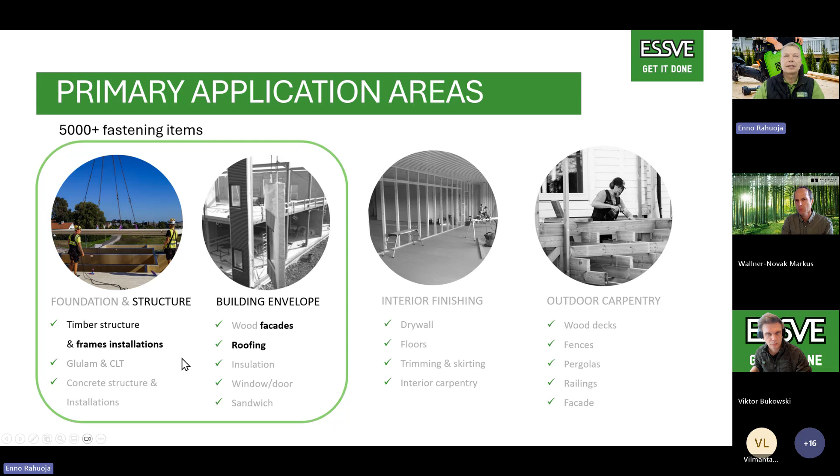What I wanted to say is that those are our 4 core focus areas, and today we are able to put together that green circle here, where we talk about roofs and facades, which is kind of a building envelope, and then it's a frame installation system. So this is the subject where we dive deeply into our mix of product range, going deeply only into that insulated wall or roof area.

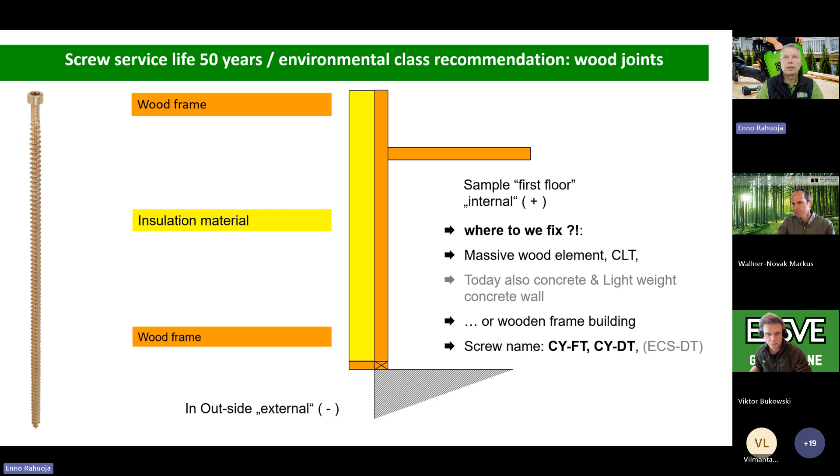Subject shortly: when you have some kind of timber frame wall, then it's an option to put full insulation on top as the first step. Normally you build that up with brackets or a cross pattern framework, but today's subject is that you can have full insulation on it. Then normally you're going to have a wind barrier, which makes this application internal. And for this application, we are looking at a 50-year working lifetime.

I have put here some recommended environmental classes for the wooden joints as well. Now we're coming to the framework.

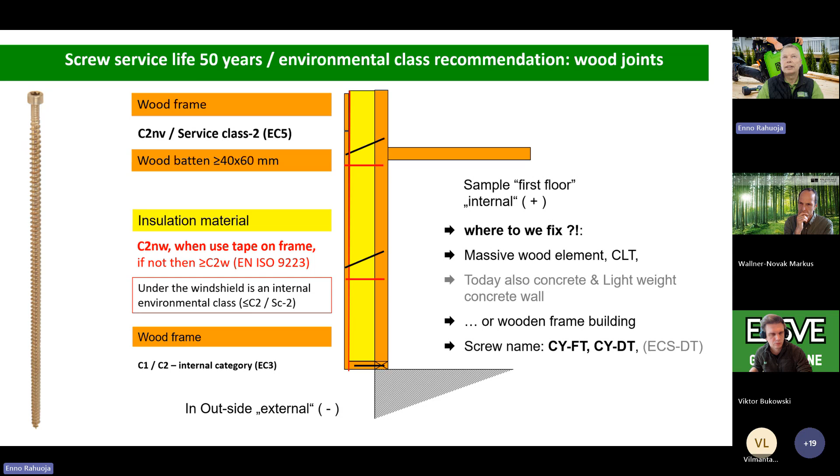The framework is normally fixed with first 2 or 3 screws to get it leveled, but also cross-fixing, so we get a nicely fixed frame. According to the calculation tool, we determine the distances here. In the next step, you need angle fasteners, which take all the vertical loads, also according to the calculation tool we're going to introduce you to later. Then it comes to the facade.

I will remark that in the ESSVE range we have the well-known ET-T screw, which is a double-threaded screw. I have marked it red for the reason that the double-threaded ET-T screw is not recommended for this application, because here the second thread has a different geometry and has a traction effect, meaning it pulls elements together. When you fix it, it's difficult to install and level the facade framework on it.

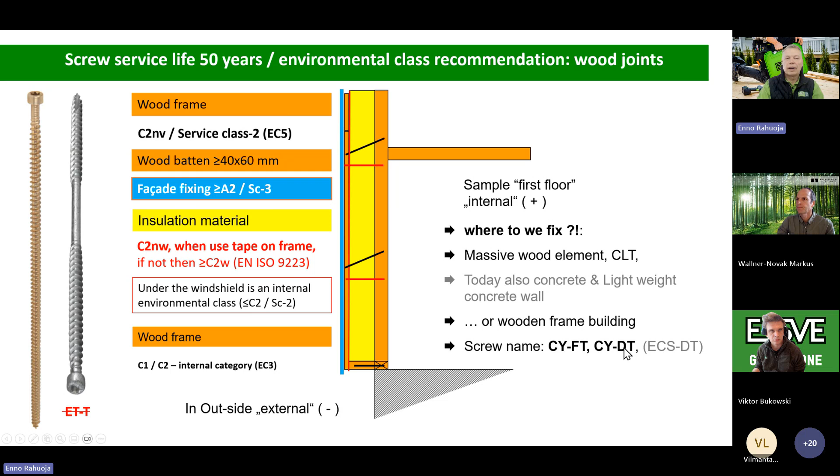So for that, we have other fasteners. Either you use a full-threaded screw from the ESSVE range, or we also have a double-threaded one with the same geometry, called CY-DT. This is a light intro from my side, just to show that this product also has ETA approval, and it is approved for roof and facade, having a CE marking on it.

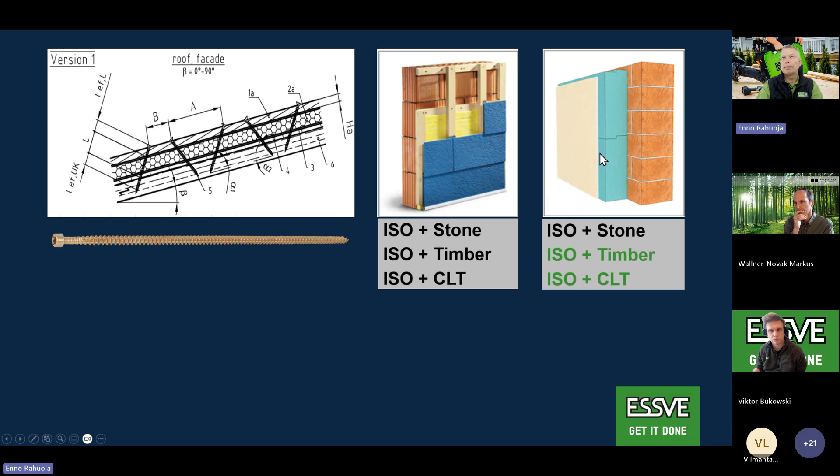Here on the right-hand side, you see typical facade elements where you build that up. I have background on brick, but it could be cross-fixing of different timber applications, or it could be a wooden wall with an existing type of solution that you want to renovate. So for that reason, you can do it like CLT new buildings or renovation if there's timber behind it.

We have 4 key arguments: insulation in roof and facade areas, so cross frame is not needed and can be replaced with screws; good thermal insulation up to 400 millimeters; and thermal insulation has a wide usage area.

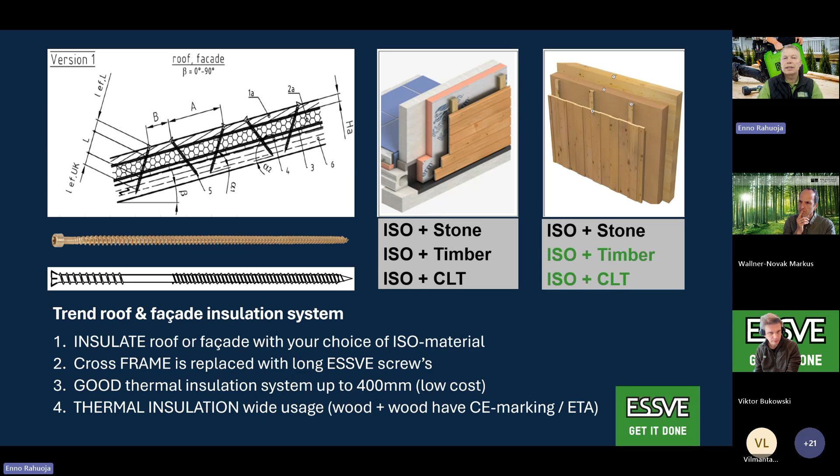If you have more questions, in Eastern Europe we are also developing further on timber-to-concrete application, but that's not today's subject. Today is more about timber-to-timber.

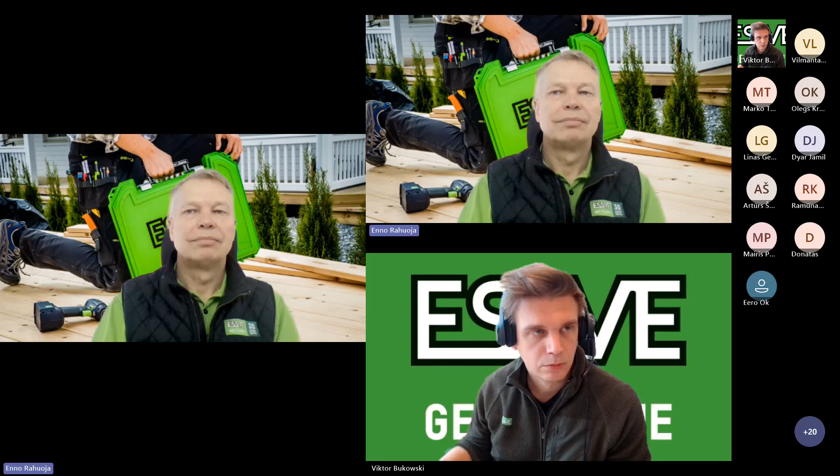So I will share my screen. What I want to do is give you a short overview over the systems there and a little bit about the technical backgrounds, and then dive into two examples: one the facade and one for the roof. It's just very brief—if you show a design tool you can just show a little bit, but if you're an engineer you have to deal with it and consider a little bit more. It always looks very easy when you show it, but that's in the nature of this.

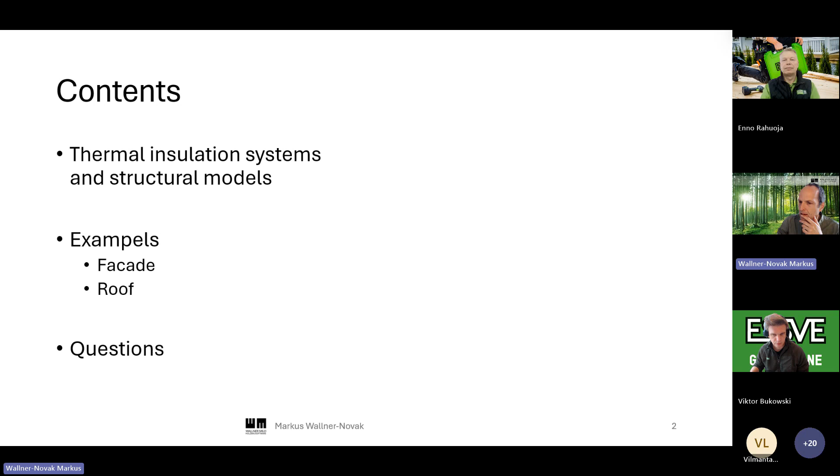So I start with the roof because that was the last slide we saw, and there we have two different ways to either newly install or, very often, to refurbish and thermally insulate later. One is with the so-called hard insulation, which is a more or less incompressible insulation.

And the screws there hold the roof structure that is built up against sliding down, on the one hand, so they are inclined. There is a mechanism, as we will see in another slide, where the screw goes into tension and the insulation can catch the compression part, which is not very much, but it can transform it.

On the other hand, we have a few screws that are responsible for the wind suction—so some screws are there against wind suction if it's required, depending on the weight of the cover and the other screws.

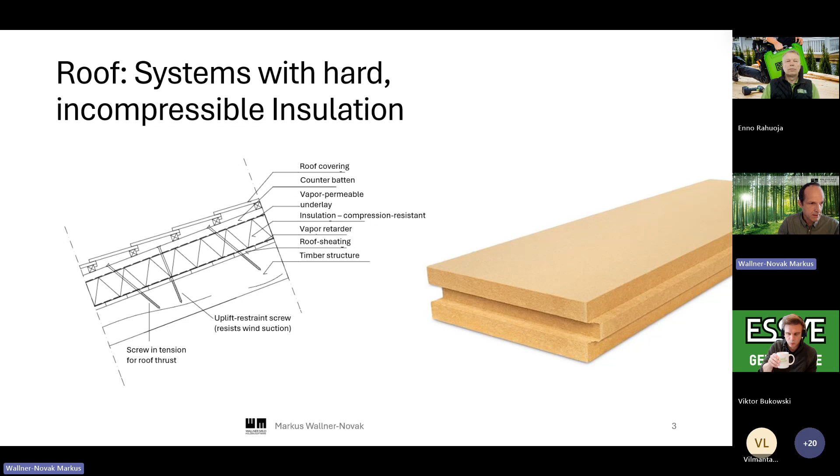Then there is a second system where you can use soft insulation. There it's more like a stilting system—the insulation just insulates and doesn't carry any compressive loads or something, so you keep a distance. It could be a void as well, but you want to use this space for the insulation. So these screws are in compression and tension, and depending on the loads, you transfer the loads through the screws, and that keeps the distance.

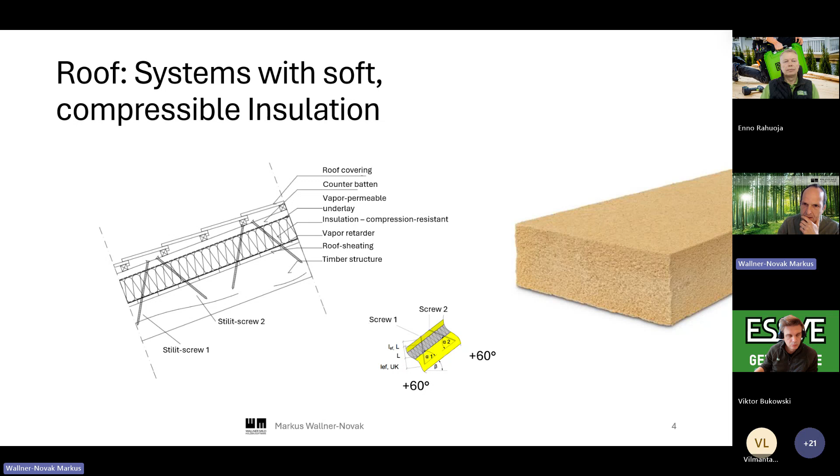There's often a question: what's the difference between so-called hard and soft? It's not a very exact term, we know, but the difference is the strength or stress that you can apply till the strain is 10%—that's 0.05 Newton per square millimeter. If you calculate it—I did that, it's easier to understand or memorize—if you step on this insulation, you have about 250 square centimeters at the bottom of your foot, and a somewhat heavy person would produce this stress.

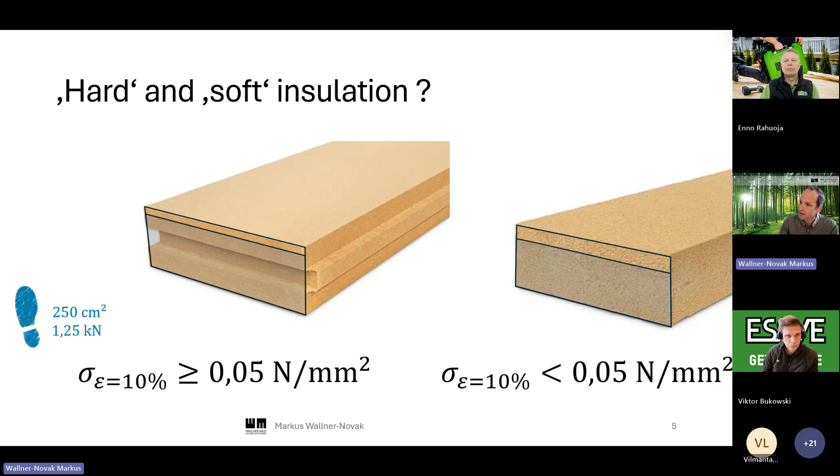So if you step on it and it compresses more than 10%, it's probably a soft insulation, and if it's stable and doesn't compress much more, it's considered a hard insulation. The producers usually define this, and we have our different products in the software as well.

Then there was a little bit of work to do with the modeling and with what can break—that's the engineer's job. Murphy's law says that everything that can go wrong will go wrong, and we want to avoid this. So that's our way of thinking: we think about all the different mechanisms that can lead to damage, to prove that they won't.

This is a bit mixed in language—I hope you follow, but I added the translation so it's understandable. So we have all the different failure modes from the screw and the wind suction, shear from the roof, and different failure modes, and the software checks all these modes. We have different loadings—it's snow, wind, and self-weight usually that are considered here in the software.

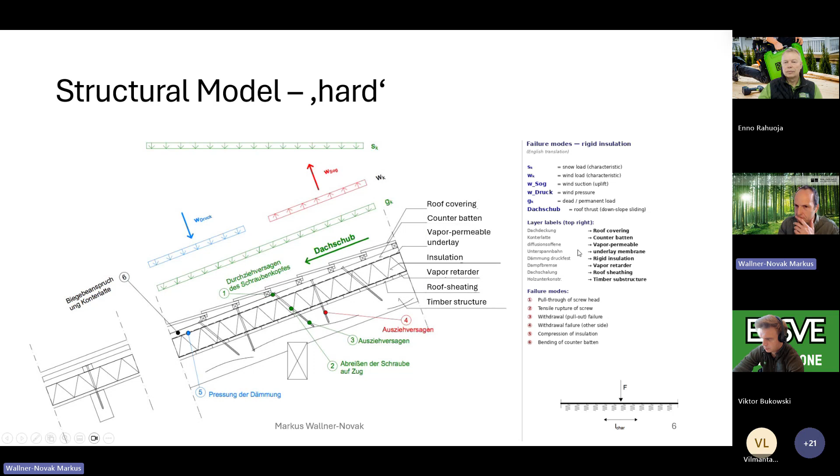A little bit more difficult in terms of statics is this stilt solution.

Because then we have to find some structural systems. The counter batten works as a light beam on top, and then the stilts are like supports, like in this diagram here. And you can find some moment lines and can solve this. That's not so much of a problem, but that's a bit beyond the European technical approval that ESSVE has, and that's implemented in the software.

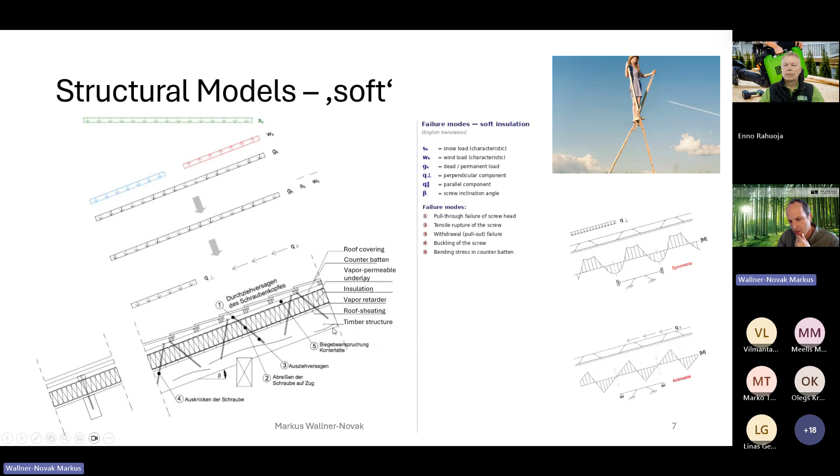So the roofs are a little bit more complicated in terms of structural models. So this we solved first, and then we continued with the application in a facade.

And I will, in terms of examples, start with the facade system that Enno just showed. Usually we have one screw vertical and one inclined, and you can set it as you want. We could also tilt both screws. You can define these angles here, the top screw and the first screw and the second screw can have its angles. In the roof, it's usually 60 degrees, like we saw here.

So they're both inclined, and in the wall, as Enno also said, usually you set the distance first, and then you screw the additional lifting screws for the vertical load. Here you only have self-weight usually as load. The screws have to carry the additional structures here, and you have wind compression or wind suction. That's the thing here. There's no snow load or something, that's clear.

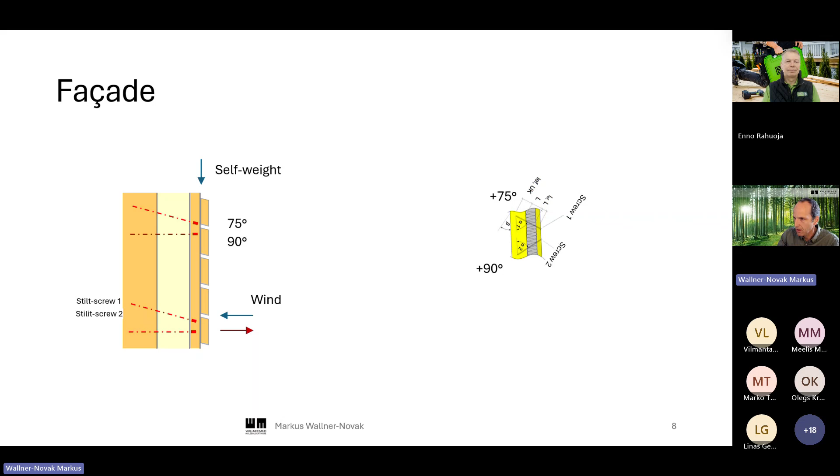Yes, so this is about the main structural thinking behind the programs we have. And I want to show you two examples just to see how the program works and give you some hints how you can apply and use this.

So we have one with a rather thick insulation of 320 millimeters, soft insulation. So this is compressible, and the screws have to take all the load. There will be no help, so to speak, from the insulation, no load carrying help. And then we have no loads, other than the self-weight and the wind. And I used the counterbatten rather thick then because the screws need to have a certain amount of thread in the counterbatten, so you have to have a bit of a section there.

And the substructure is not really important. I chose 20 centimeters. It could be less. In CLT, it's sometimes only 12 centimeters. That can depend from case to case. And then, as I said, the screw angles will be 90 degrees for the first screw and 75 degrees, so it's inclined for the second screw.

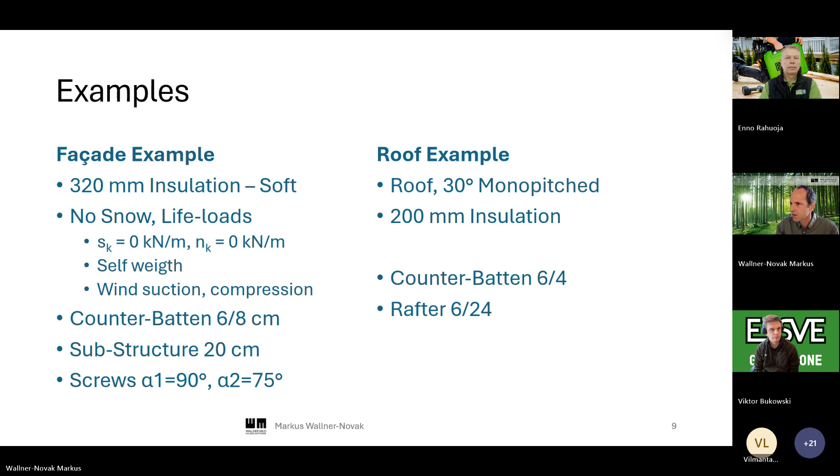And then we start with a second example for a roof. So to come to the, I just changed the screen. It's easier for me then. So to come to the example...

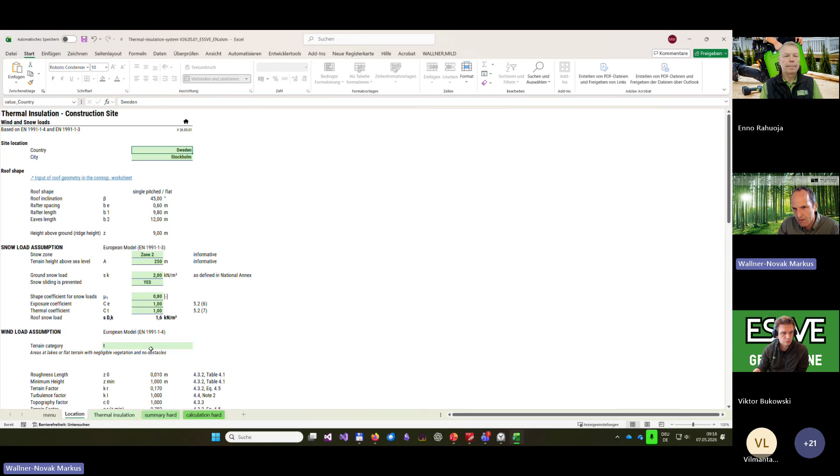And then the structure is relatively straightforward. You could set data from your site location. That's more for the roofs than for the facades. I will use that for the roof more than for the facade. So because we want to have the snow and the wind load, we could do this also. Maybe let's do this also here for the facade, because we want to know about the wind.

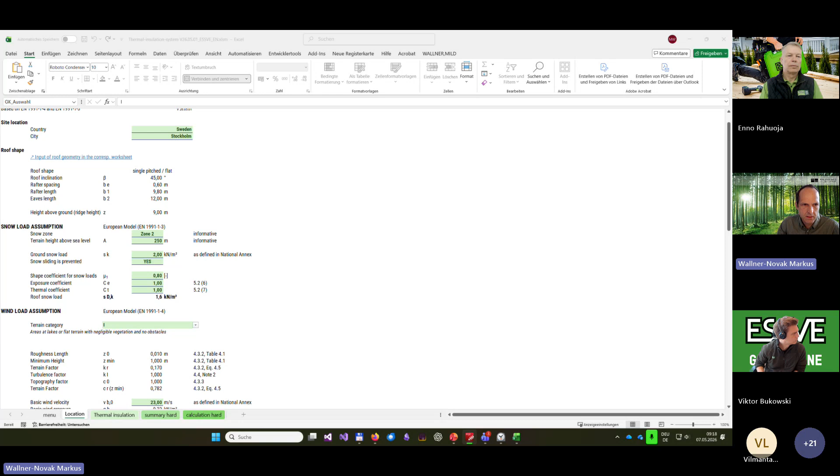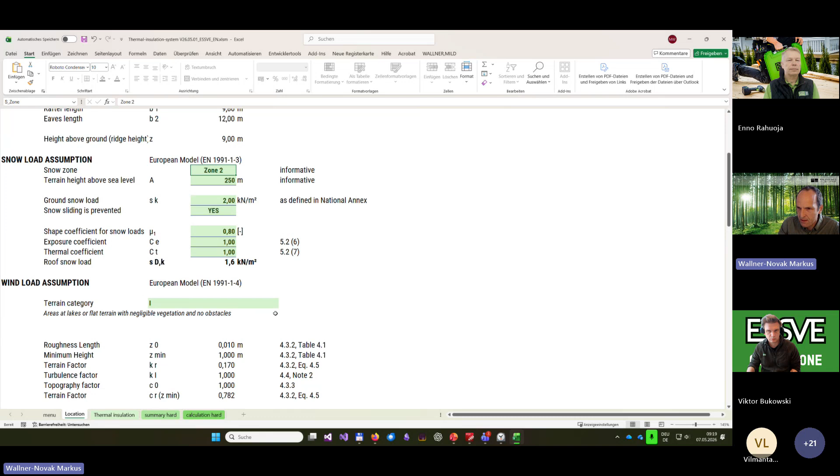So we could just set some values here. So we want to input some data here from Estonia, Tallinn, for example. The geometry will be set later, and then the snow load is not really interesting, as I said, for the facade system, but we could say we are in terrain category 2, and our basic wind is maybe 21 in Estonia, meters per second, right? So then we get this peak velocity depending also on the height, the ridge height, which we will set later. So it could change a bit, but we preset the place and inform the program how the wind will be.

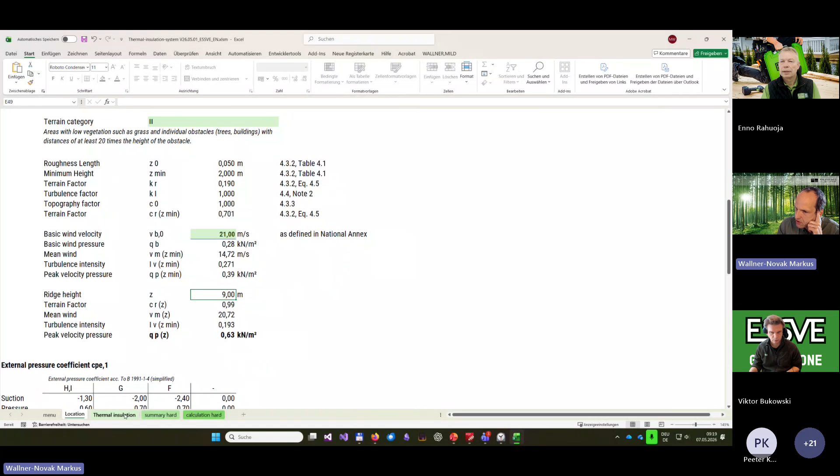Okay, so we also have these wind values here, and then we go to the second sheet, which is the thermal insulation itself, and then we have output. It's always a summary and a calculation. So the summary is the short output, and the calculation is the longer output. And in this case, we have a soft insulation.

As I stated, we want to have this system with the stilts. The screws are stilting the counter batten, so to speak. And we've set here the load for snow and also the live load to 0, because we don't need any live load here. And we can set a facade weight from the additional build-ups. That's usually rather lightweight, only 0.2 or 0.3 kilonewtons per square meter that comes from the loading.

And then here we have 90 degrees. So this is a universal tool. You can use it for the roof and also for the facade structures, for the walls.

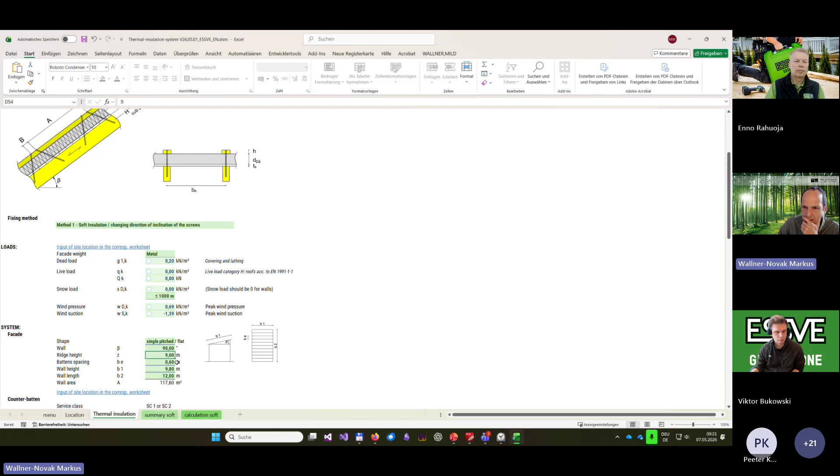And we can have a batten spacing of maybe 0.625 meters. That's sometimes or often used, and the height could be maybe 6 meters. And also the wind is calculated then for the 6 meters.

And then we have the counter batten dimension and also the quality. Usually it's a C24, and I used 8 times 6. I will give you the information later. We can see if we reduce what will happen then. So I have a rather large counter batten.

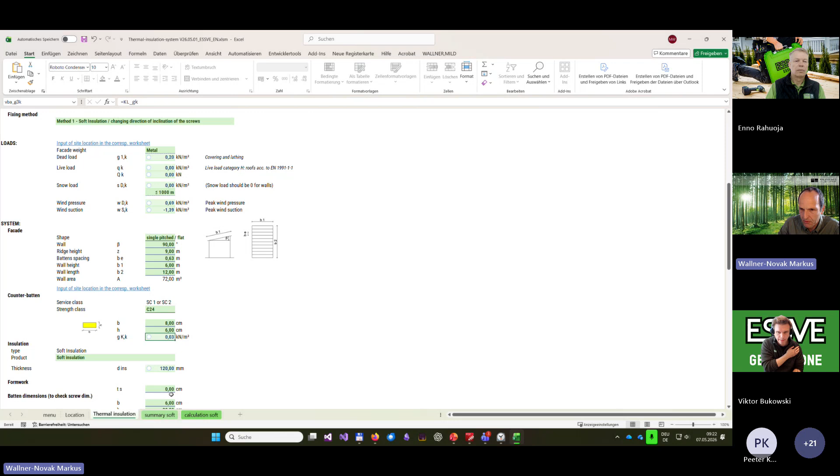And then we said we have 320 millimeters of insulation. And the batten dimension could be, I don't know, 10, 20, or if it's a CLT, it could be 100 centimeters. It's like a 1 meter stripe. That doesn't really matter. The width is not so important. It's just some information for the program to deal with the screws also.

And then we can set which screw we want. By default, it's the shortest screw is selected, which is seldom correct. And you get the information. First, here there's a block about the geometry of the screw, and the program checks all the length values and also the thread length in the counter batten and so on. So for the input, we get information about the length that is geometrically feasible.

So it should be longer than 470 millimeters with the 60 degrees. And we have to change this. First, we want to set this to 75 and 90 degrees because we have this system and the length changes a bit. And we can set this now by hand.

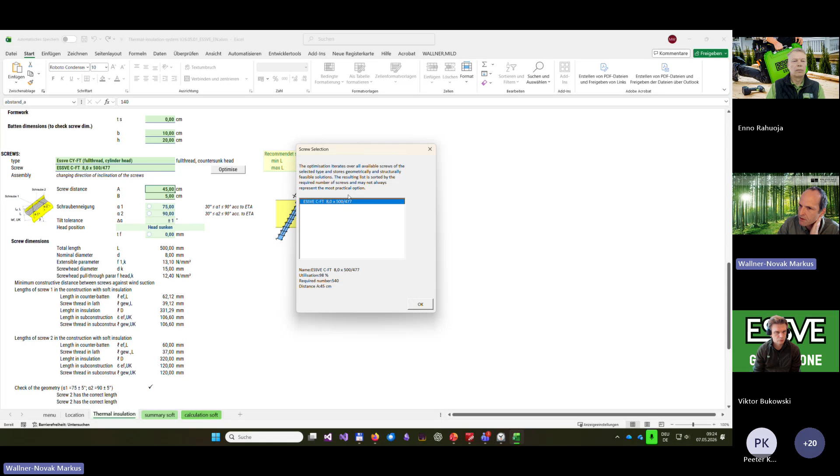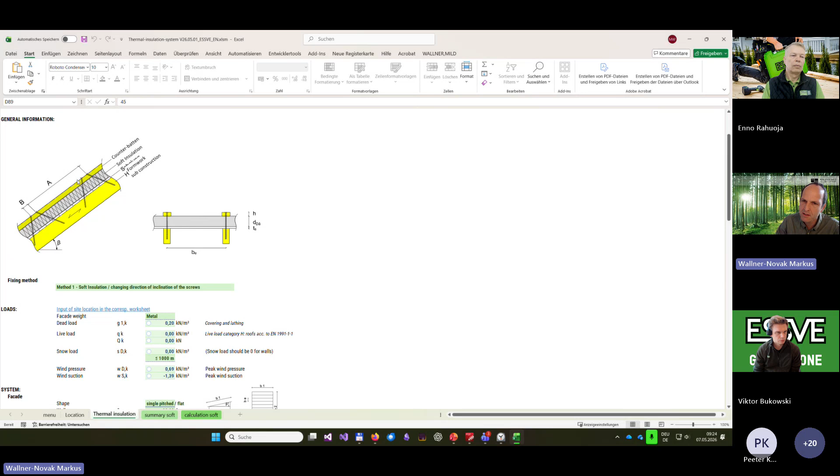And the only thing now we have to set is the screw distance, or we could say optimize. So then the program looks for the screw that's geometrically feasible and also changes the screw distance. So every 45 centimeters, that's the result the program finds - we have to scroll up - so every 45 centimeters, it repeats.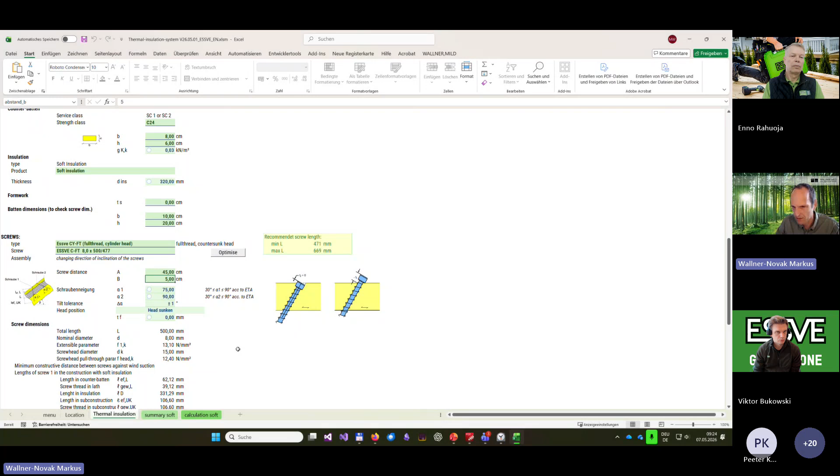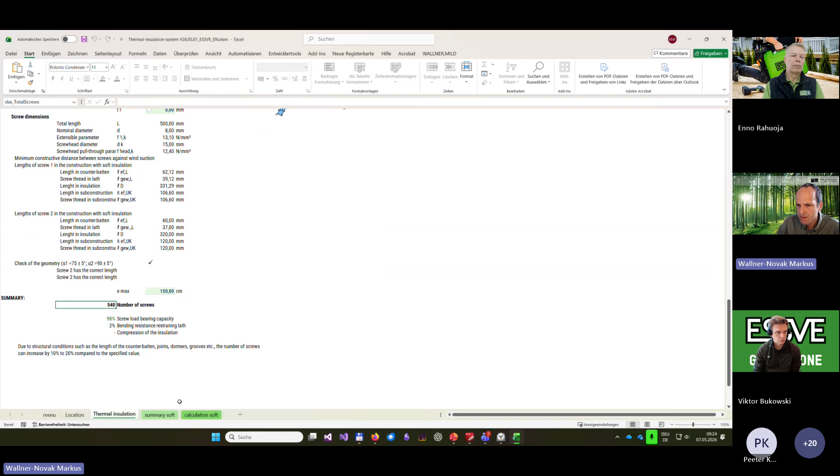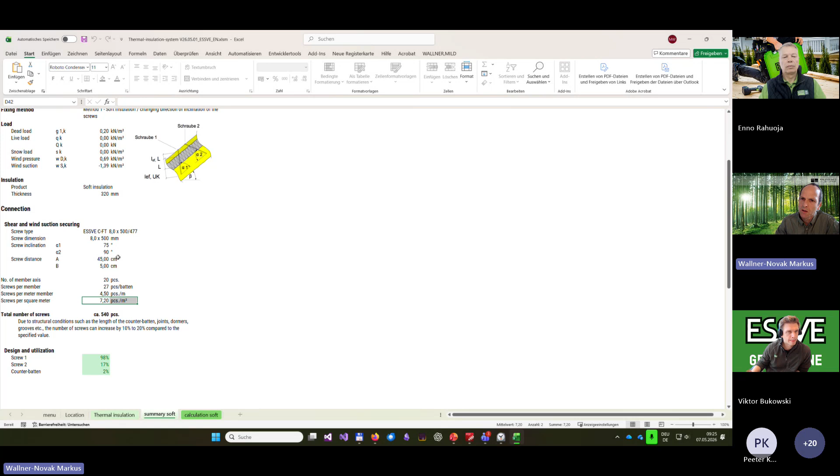So the axial distance is 45, and between the two screws, it's 5 centimeters. That's usually a default. You can change this also, that doesn't change much. And then as a result, you get the number of screws. You get 540 screws in this case for the whole area. And in the summary, you can see how many screws per batten or how many screws per square meter wall you have, so that you can calculate and estimate the price for the screws in the project.

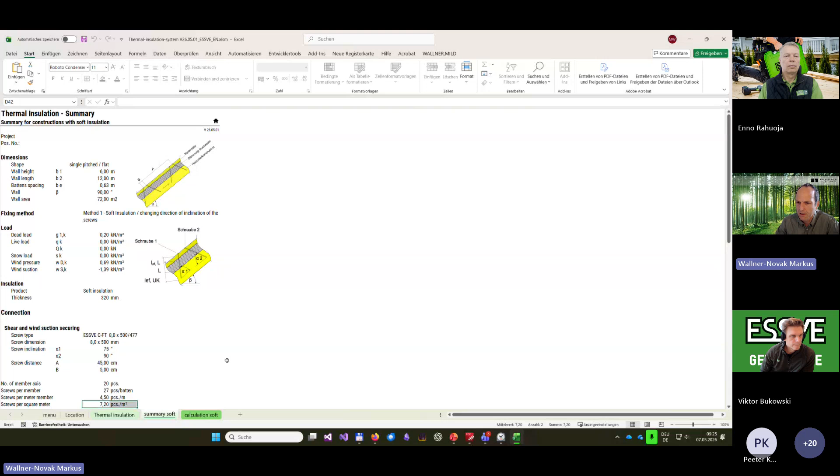And this is only a one-sheet information, which gives you most of the required information. And if you want to see the details, you have all the calculations here with the models and also the screw design of this installation.

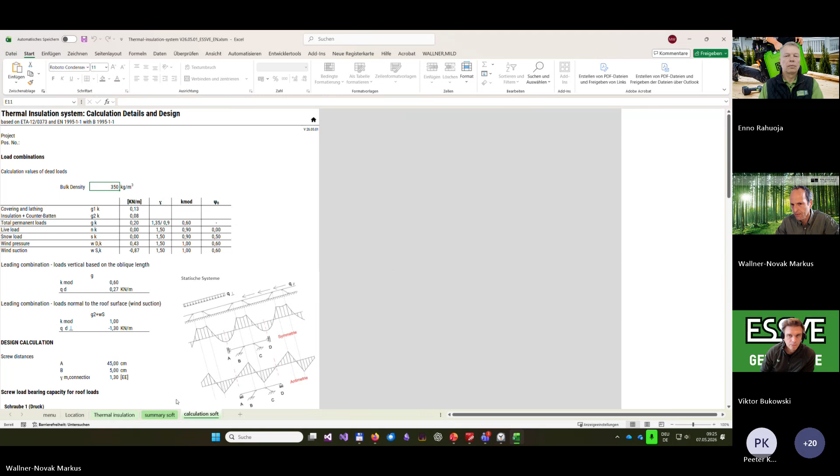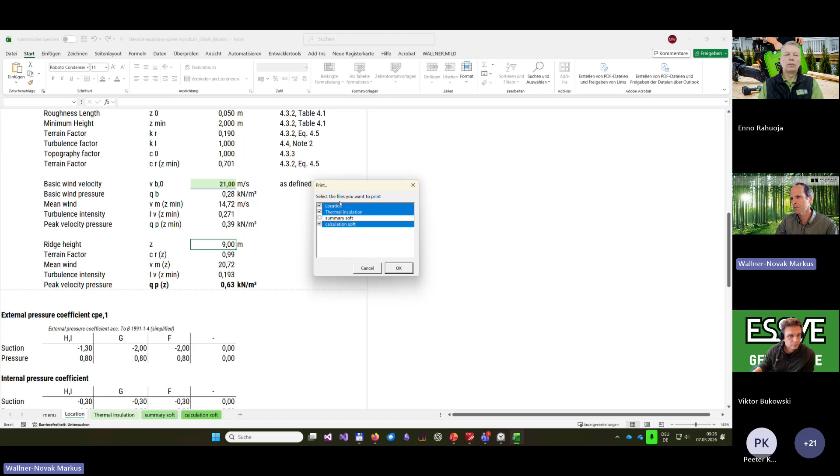And then when you finished, you can go and print. This is a German version now, but sorry - it should work also in your language, in your Excel language. And if you press print, then you have the option to select or deselect parts. You could just print the summary if you want, or you just print the location and the calculation, whatever you want. So you can choose between the sheets that we have.

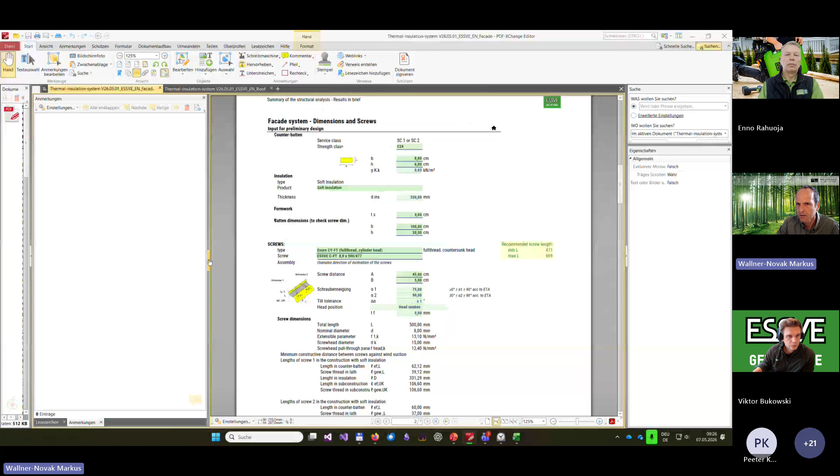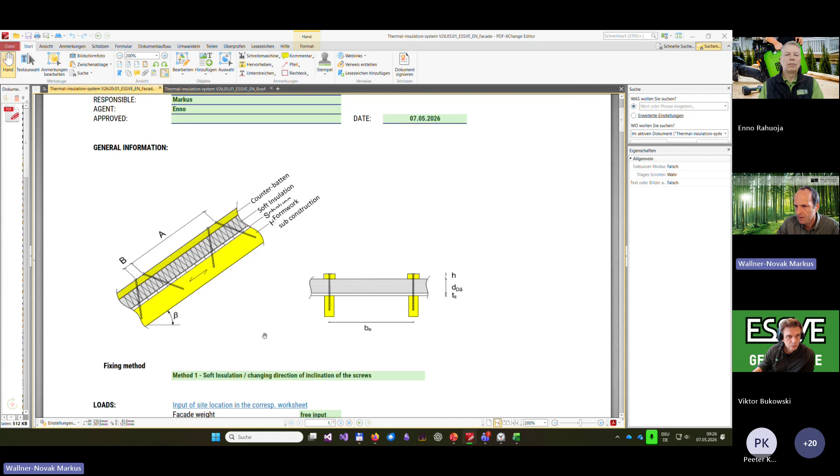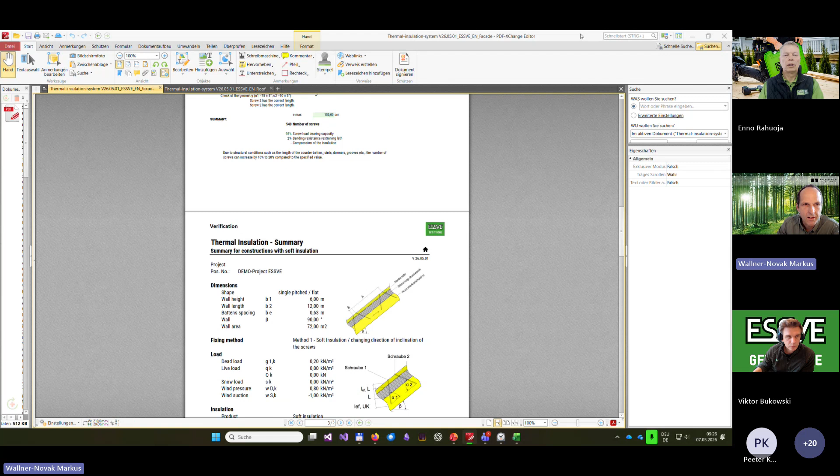And the result then is a PDF file that looks like this. You get here the information about the facade. We didn't fill out the required input data for this example, but you get all the data you need for the design and also for the producers, or for the end installers.

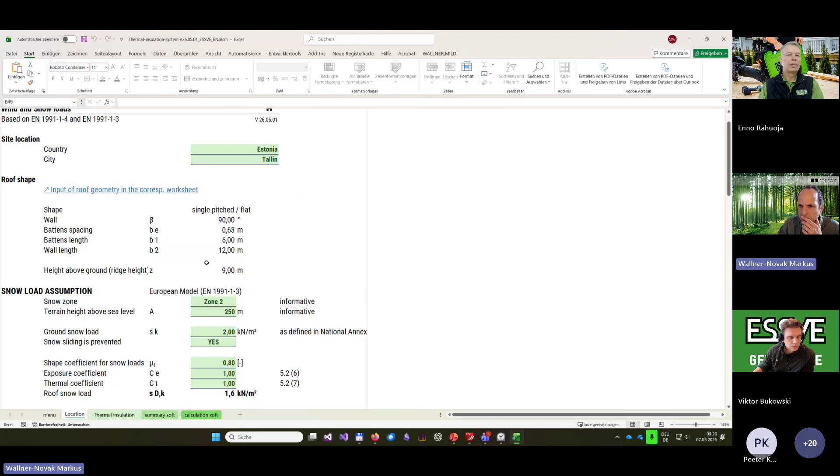Thank you. The other thing we could do, just a very brief look - we could set here a roof structure. Then we could maybe try with a hard compressible, incompressible construction, and maybe have a 30 degrees inclination.

And the screws then, the inclined one has 60 degrees, and the other one is vertical for the wind suction. And maybe here the insulation thickness is less than we had before - it's maybe 20 centimeters, 200 millimeters.

I think that's what I wanted. And then I can here also press optimize, and the program tells me what size of screws is feasible. Usually it's the narrowest and the shortest possible that's suggested.

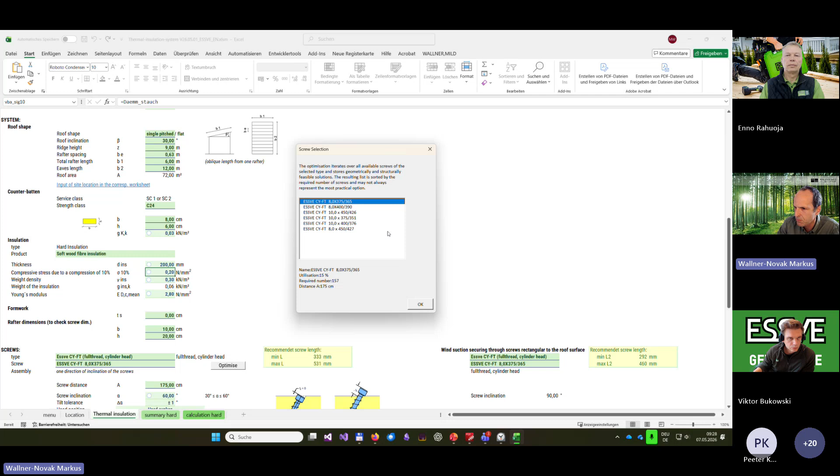So you can choose this one, and the program then also checks the geometry - that's the first thing - and then also calculates the number of screws.

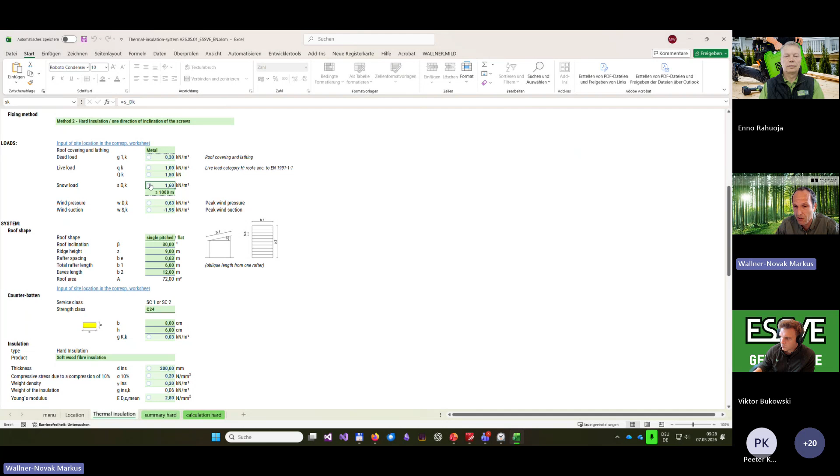In this case, that's something we need to set - I have to reset here. These round buttons are to reset the values. I set the snow load to 0 because it was a facade, you remember. Now I reset to the default snow load from the location we had.

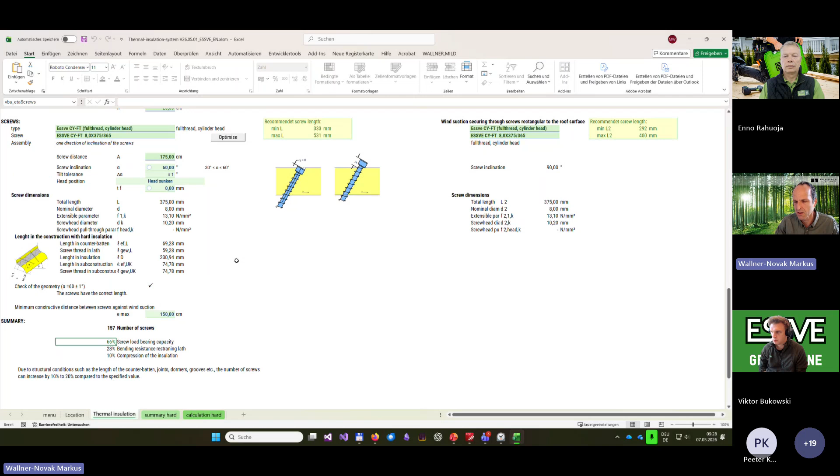Now the values will change a bit. It's 66% load bearing capacity of the screws, which is quite a reasonable value. And for the wind suction, we can set a maximum distance because sometimes the values are very low, and usually you want to have a certain amount of screws, at least 2 per rafter, against the wind suction.

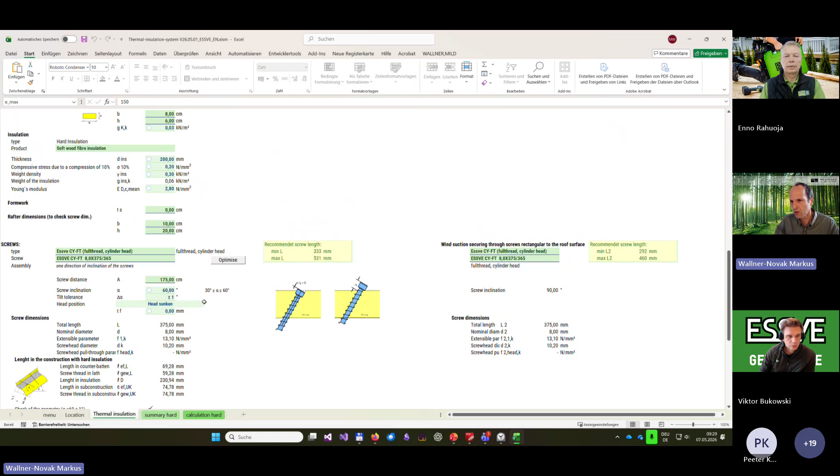And that's another option - to use this program for single pitched or double pitched roofs.

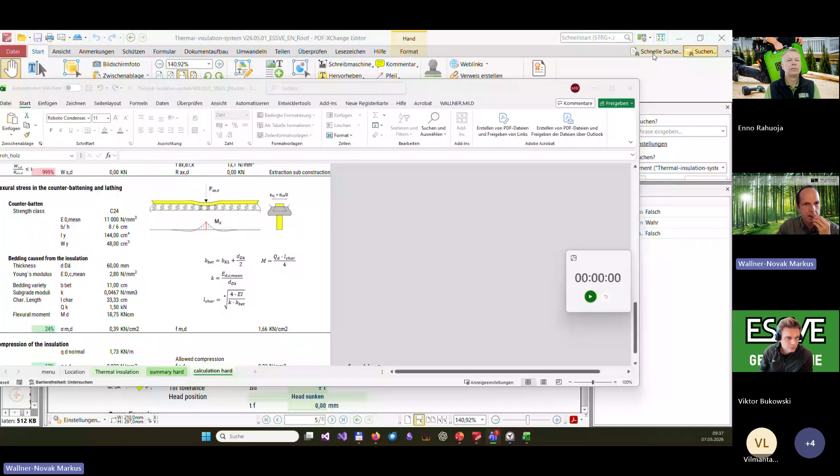We calculate here - this is the part of the counter batten, and you can see the compression and the model for the moment, and almost everything here. You have the young modulus, the thickness, and the bedding width, so there's not much missing to estimate. It's not so easy to calculate the exact value, but you can estimate.

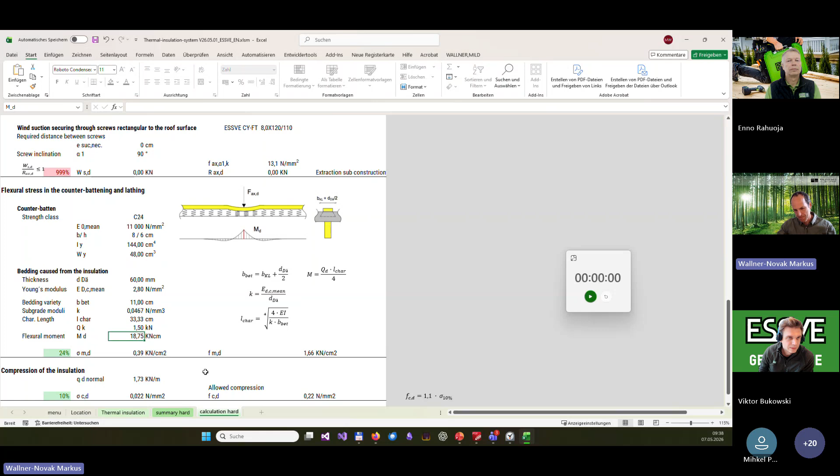But not in this direction - rather if you use it for the facade you would want displacement in the vertical. In this way it would be in the horizontal direction, coming from the tension of the screw a bit. Usually that is not much, it's relatively stiff.

Yeah, we could calculate this one. Might be interesting.

Coming back to the previous poll: 40% happy to use, 26% more focused on facade, a few on roof, and some didn't feel it was relevant. I have another poll as well, then I will probably raise another question to Markus. This is related to what application area you're looking forward to using it in your next project - you can give multiple answers. Happy to hear your feedback.

What I had as a question is how to deal with a thin counter batten, because in Eastern Europe the counter batten is often very thin. What do they use, what is the solution then? Yeah, there's one thing, let me share the screen again.

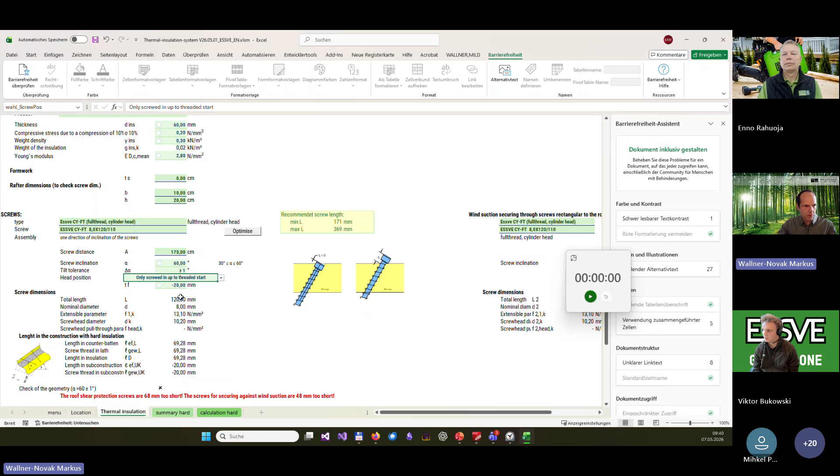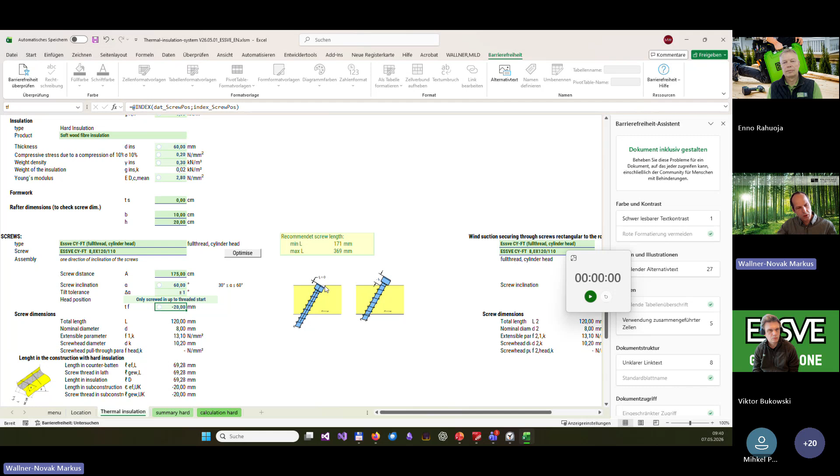You can set this here: you can have a sunken head, you can have the head outside, or you can set it also to this thread start. So it's for this selection screw here. In this case, it was 20 millimeters from the top of the screw till the thread starts, because it's a cylinder head.

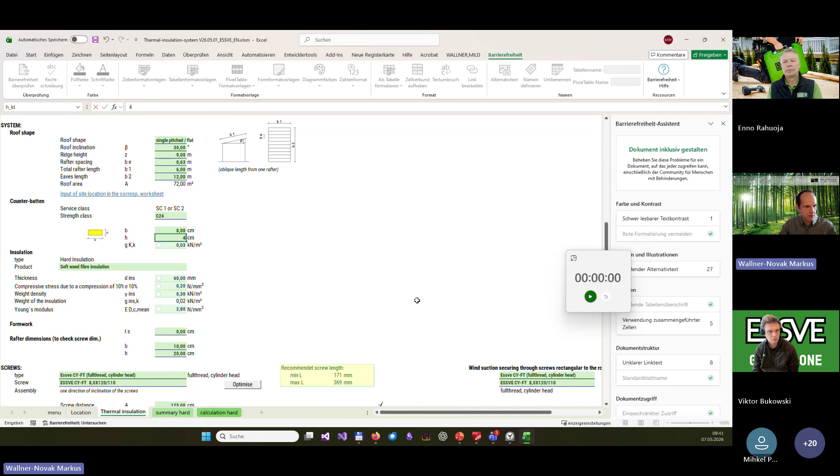And if we lift it up a bit, then we can have thinner counter-battens as well. So we could have 4 centimeters as well. Now the screw might be too short, but the length in the... we should, okay.

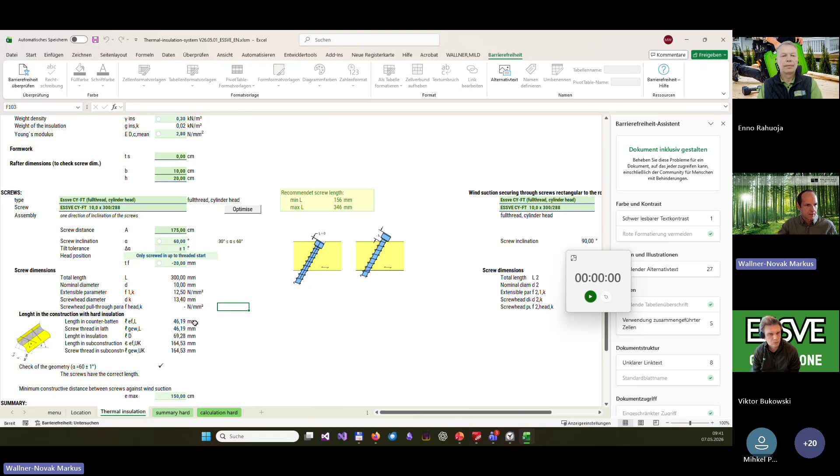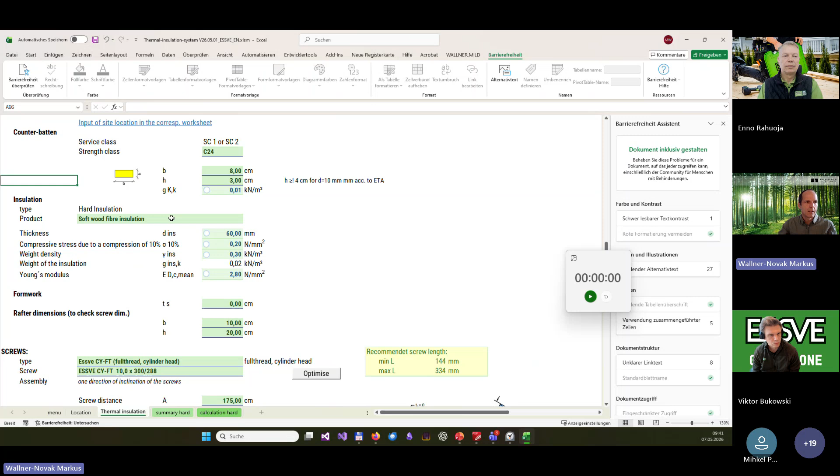We have to have the 300, so then the thread is longer in the substructure. And if you have now it's only, let's say 3 centimeters, it says it's not recommended in the European technical approval.

You can still decide, I still want to calculate it. And if I leave 4 and set this to 0 and say the screw is 0, in this case it still works, but that's an option you can deal with. So if it's only a question of millimeters, you can set the position of the screw in detail.

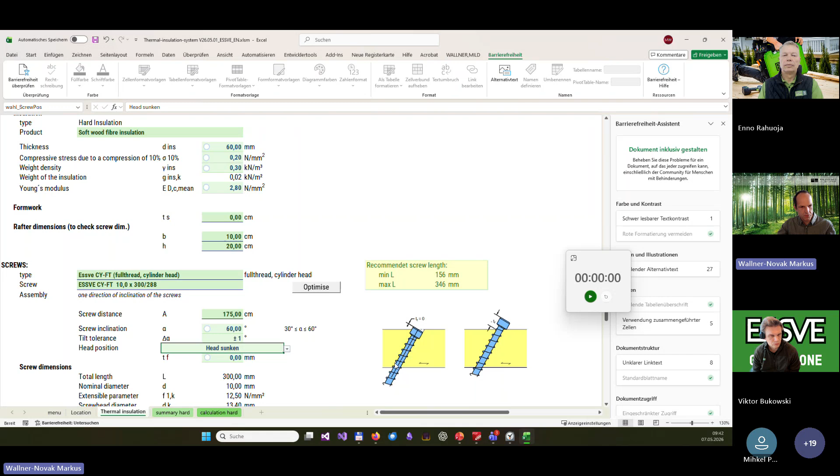Inform also everyone else about this practical question: can the construction worker actually hit the 45 millimeter rafter through the 400 millimeter insulation? Quick feedback: yes, it's a challenge, it's difficult in such an application, and we need good masters on construction site who will handle that case. But it is possible, maybe that's the quick feedback here.

Usually they have to put the line. I don't know what this is in English, but you have this colored rope, and you make a mark so that you keep your position. That's always important, also to instruct the installers.

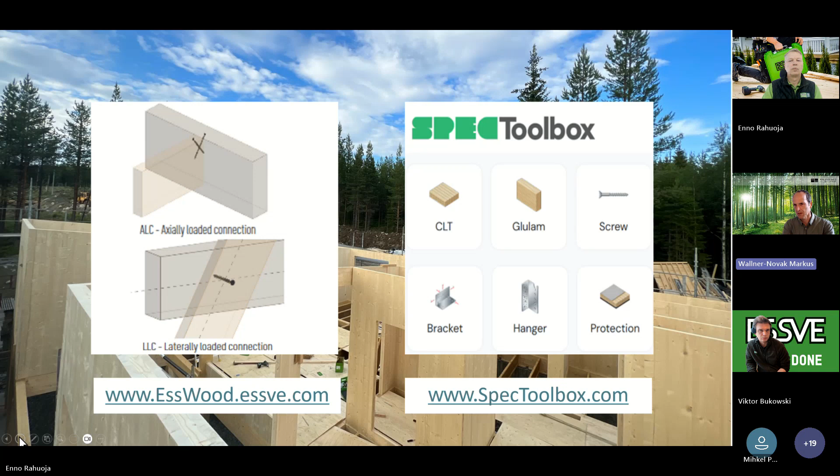I think that's also the reason, because for the 8 mm, because of the length, and also that you don't want the screws to move too much - 8 mm is better because they are more stable when you screw them in. I'm not going to raise any feedback questions next, which actually was in the plan, but I've just informed you.